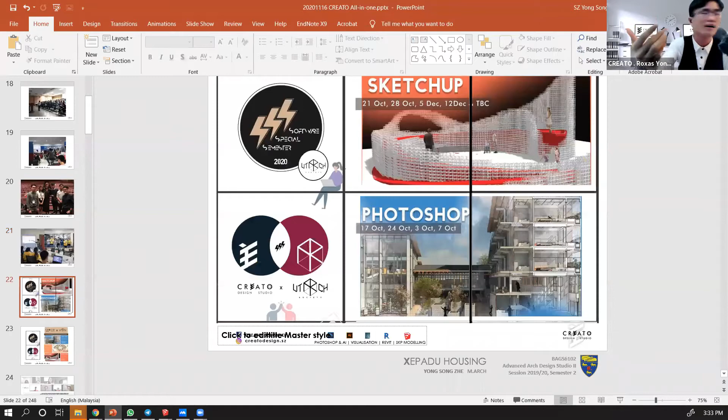Recently we've had a software special semester with UTAR Architecture Society. In this program, students may register for our courses, namely SketchUp, Illustrator, and Photoshop, through the architecture club. This workshop was just introduced about a month or a few weeks ago, so it's quite fresh, the first time.

During this, students can register via the club, and Creato will help promote it and sponsor a certain amount to support club activities, like student funds. It would be great if this continues in future, but we're not sure yet. This program's registration runs until the end of November for the next course, which is Illustrator.

As you can see, there are three things we're highlighting in this collaboration. It would be exciting to have similar collaborations with UM or TAUC, or other schools as well. We are grateful to be able to support some of these activities in terms of funding, within our capabilities, along with some of the topics we used to cover.

We share about authority guidelines, how many setbacks, which books we can refer to, the Bomba guidelines - things that weren't taught much in school, we share in the workshop. This one is a free workshop, but maybe only for Creato members. Sometimes we have workshops open to the public where you can invite your friends, and sometimes workshops exclusively for Creato members only.

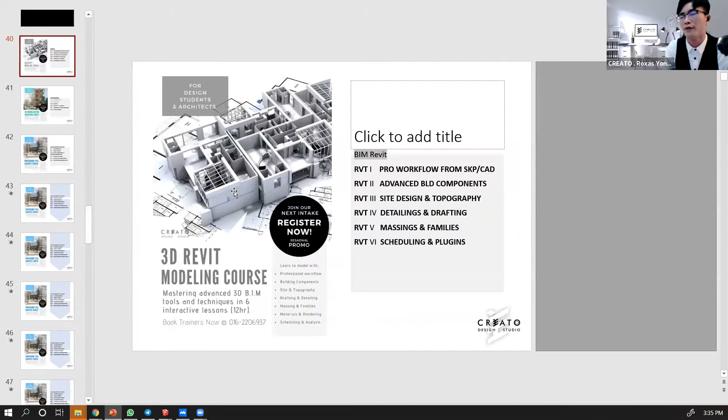These are a quick glimpse of the Revit course we have, the Lumion rendering course we have, and some of our previous competition works. This is some of our final project works, Photoshop work we have, and Illustrator we're going to have in January. Registration closed, and we decided to close it at the end of November, and this is what you are learning now - components and styles.

Get it here. Just get your SketchUp ready now.

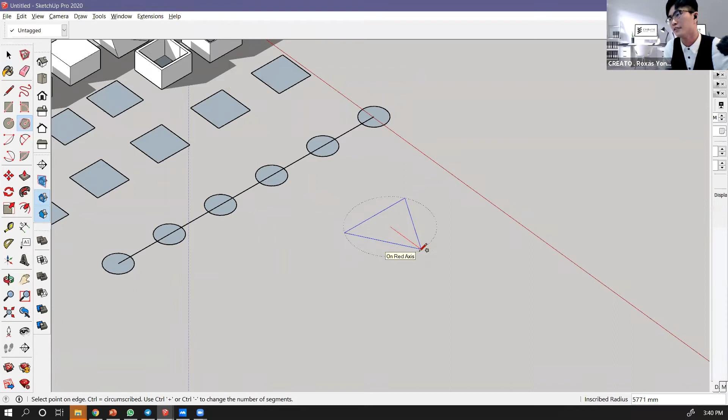Okay, firstly, to make this kind of stars, let's imagine starting to make a more complicated form. So let me make a kind of triangle first. I have this triangle, so I can decide the radius. Let's say I go for 3000.

Okay, I can press S to scale it up. S, okay, S is this one, scale, beside offsets, the neighbor of offset. So to scale it up, I hit S, and then I can drag it to make it bigger, or hold Control to make it bigger, and you can see there's a scale factor there. We can scale it up to 2 times bigger.

Okay, if I hit 2, I hit enter, so this is 2 times bigger. Yeah, I got it. So 2 times bigger. We can also scale it only on some of the axes.

Another way, when we mention about scaling things, there's one thing I want to mention: instead of using S to scale something, there's also another trick to scale things up, the entire model. Now we are only scaling one object, which is this triangle. But if you want to scale the entire model, what we can do is use the tape measure tool, which is T, which is this one.

All right, let me try first. Okay, cool. What I did was, initially you can measure this one from this point to this point, it's 10392, as you can see at the bar here, the length 10392.

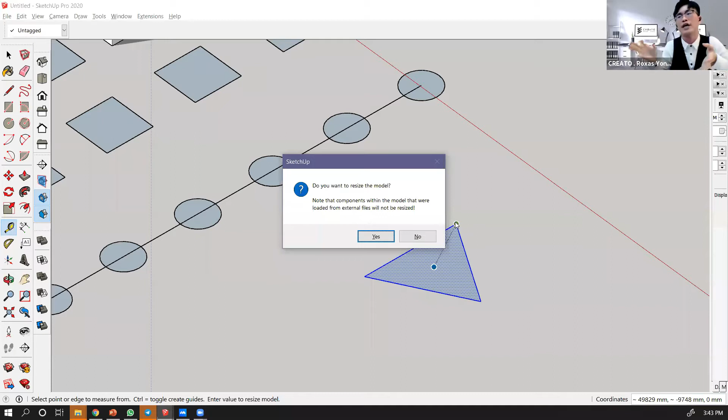But if I want to limit this, let's say instead of 10392, I want to make it become 10,000 - to let these things fit 10,000. What I can do is select this, using the tape measure tool. From this point to this point, I press second time, and then type in the new numbers I want, the new measurement, which is 10,000. So I hit enter, and it will ask me, do you want to resize the entire model, this whole project? I just say yes. Then the whole thing will scale down, so that it achieves perfectly 10,000.

Note that this is actually scaling the entire project now. So you will ask, in what situation will these features be used? This is when sometimes, like when we want to scale down - initially this measurement is the real size, because this is a 3-meter wall, 3,000. But what if you want to scale it down for 3D printing, or for laser cutting to make a physical model? Then you have to scale it down to get the model measurement. Let's say you want to make it 1 to 100, your model scale.

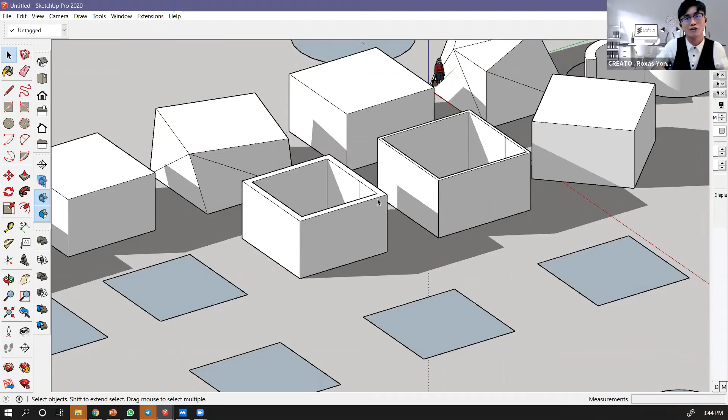Currently this number - let's share with you how to calculate, like a revision. So now this is 3,000 in reality. So 1 to 100 means instead of 3,000 mm, it will become 30 mm - 3000 divided by 100, so it's 30 mm. So now to resize this whole thing to become a physical model size, not real size like this - a physical model size that you can put on your table, that you can build using cardboard.

So this is how I can resize it. I just use the tape measure tool - this is the trick. You go to one point, the second point, then type the measurement you want. Initially this is 3,000. Just now we said if 1 to 100, it should be 30. So I type 30 now - you can see at the bottom right corner there, the tab there. Then I hit enter. So it asks, yes, I want to resize.

So the entire thing becomes very small already - small until, yeah, you can see this is like a model size already. So let's confirm it - is it 30 mm? Is it that precise? Yes, 30, you can see. I use this to give the measurement - yes, this is 30 mm. So with this you can print your model with 3D printing or make it for laser cutting.

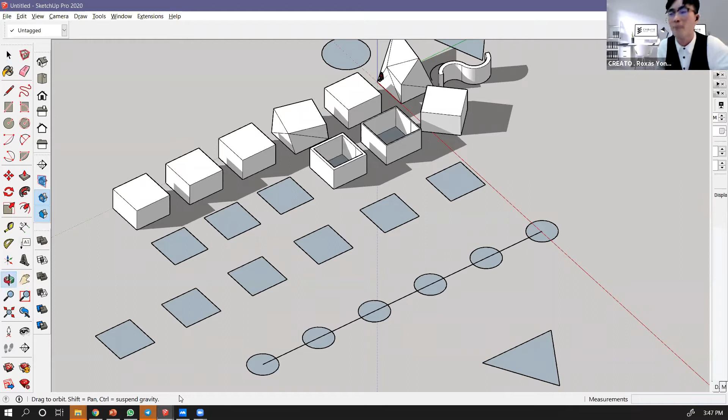Okay, let's say we want to make this kind of shape, the star shape. So from here, maybe I can... okay, there are a few methods, a few patterns I can make. Let's say from here I can go. Let me scale it down first. I scale 0.5, okay, so like this.

So from here, let's say I make a rotation, I can hit Control. Let's say I want to rotate 90 degrees or 60 degrees. Cannot.

Okay, for this one, let me share with you a tool, which is one of... you can actually... I can make this a group first, I hit G, and then copy to the side. Then I can right click, I can flip along. I flip along, maybe group's red, and now it actually becomes a mirror. How do I do that again? These items, I copy it first, duplicate it first, then right click, flip along, group's red.

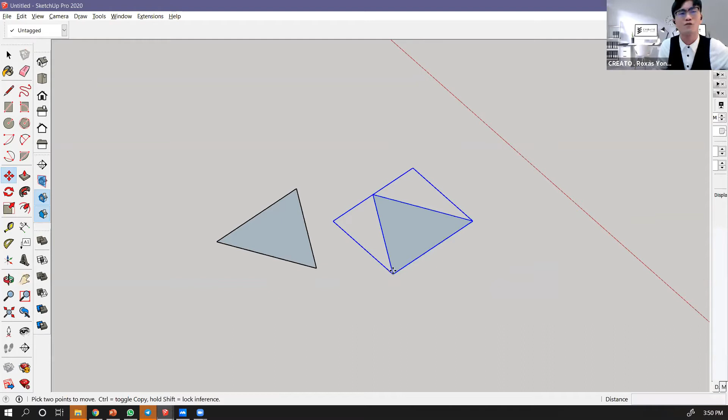If you don't have the plugin, mirror it first, okay, because you'll learn all the plugins starting from the third lesson. So now I'm doing it without any plugins. If I have plugins, what I will do is just draw the mirror axis, so I get these shapes. But it's okay even without a plugin, you can do it like this method.

Flip along, okay, flip along, and flip along, group straight means this is the red axis. No, this group has this red axis here. So you can see, actually, inside, every time you group something, it will have its own axis, its own origin. So this group has its own origin, its own blue, green, red line.

So I have this, let's say I want to rotate it. I can... okay, there's a lot of things I can do. For example, let's say I want to rotate it 45, 60 degrees, then I can times 6. So I got this kind of shape.

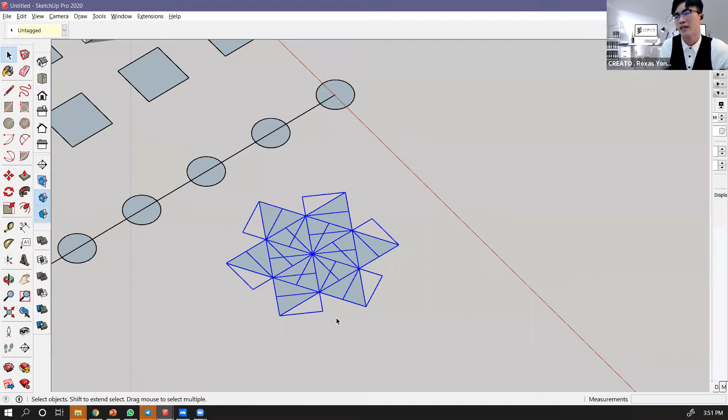All right, but now currently each of the triangles is in a group. So if you want to ungroup them, it also can be done. I select all of them, then I hit X, which is explode, so now all of them are exploded, it's not in a group. Okay, so if you don't want the line, you can also erase them.

Depends on what kind of shapes you want to play with. So what else? I copy this portion, then let's say I want to rotate it 90 degrees, then times 4, I get the shape. Can you get the shape as well? Explode now, it's like a shuriken, the ninja's tool, 手里剑. So explode on the shapes, are you able to achieve this? What else?

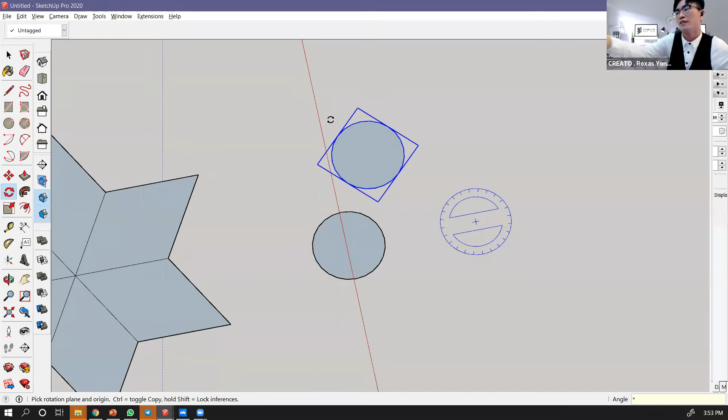So this means even if it's a circle, if I want to rotate it, I also can, I just have to define the origin. I define the origin, then I can let it rotate. Let's say I give a fixed distance, 45 degrees, and then say times 9, so it will rotate with this protractor as the origin. So I say times 8, okay, so I got this.

Okay, so now it's like your creativity to create pattern, to create form. First is pattern first. So it's time for you to explore on your laptop.

So for circles, there's a bit of a tip for you: sometimes you cannot find the origin, but what you can do is just hover to the edges of it, then it will hint you where is the origin of the circle, the very center point. So like this, I know, so I can do, let's say, times 6, 13 degrees, 60 degrees, times 6.

Okay, so you've got a different kind of formation, explore your formations, even square. So for sketch, our mini task 2, we want to see your creativity of exploring this kind of pattern in SketchUp. It's time for you to explode, to unleash your little world of creativity, okay? Explode your creativity world inside you.

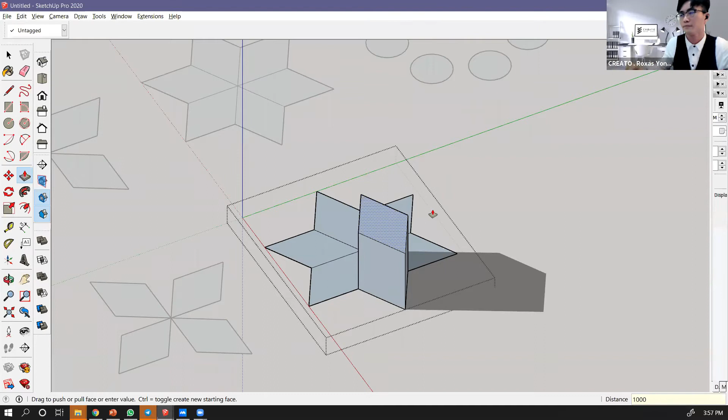Maybe not. Okay, let me push it first. So I try to push it to a height, let's say 1000 to all sides.

Okay, some advice for you. Actually, this gray surface is not so recommended. Better you select those surfaces, right click, reverse faces, make it become positive faces. There are more advantages on positive faces, but it's not a very big issue. Because last time, for Lumion, they cannot read the gray surfaces. But nowadays, if you are not mistaken, it can read this negative face already. So not a very big deal, but white surfaces will give more advantages, especially when you're presenting, also more presentable. So what you can do is select those faces, right click it together and say reverse face. Reverse faces. Make it more presentable.

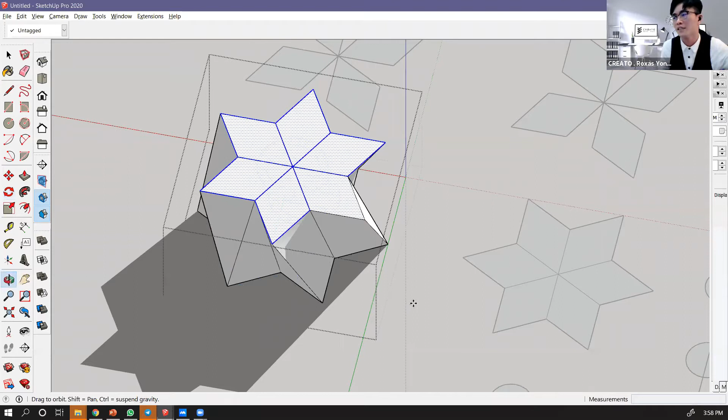Okay, let it snap to the adjacent, the neighboring shapes. Nice. Select all these pieces. See, I can rotate it or not. Yes, I can rotate it like 30 degrees in this case. Okay, so you got this, the degree. So what if I copy this again, these items again to the top?

All right, then maybe I can say it's not so good. Okay, just now I have already rotated 30 and 30 degree. So what if I rotate furthermore? This time is 60 degree, 90 degree, okay, or 60, as long as it fits.

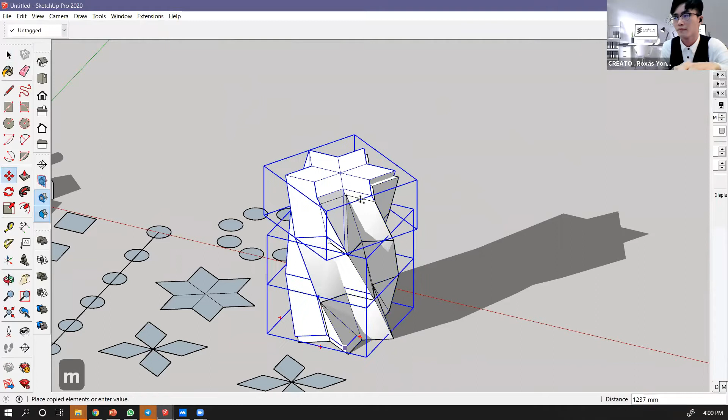One more from this to another level. Okay, rotate again. So you can see it's like a shape, it's like twisting already. So you can copy this module, like I can multiple select them. And hit M.

Okay, so you got this monster tower, like twisted tower, like done by who? Frank Gehry, is it? Okay, or Zaha Hadid. Very modern style of twisted tower. Okay, so practice this. From here, we can achieve this. And no matter you are year 2 or year 3, sorry.

Okay, what else we can do using square shape? Yeah, let's explore using this. Okay, once more time, similar method I will use. Firstly, I drag a height first. Let's say any height. Let's say I give a 3000.

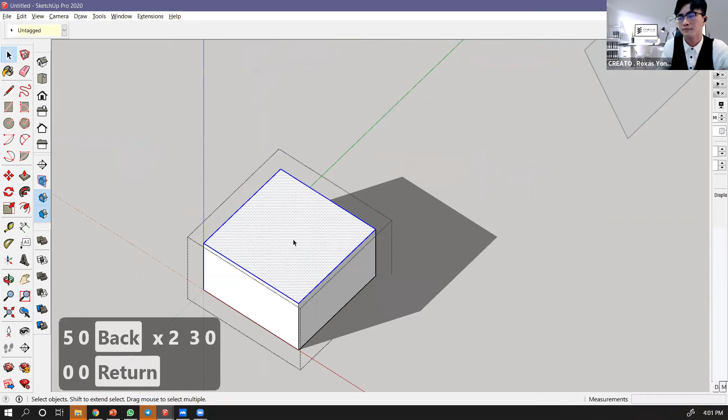Okay, here's another method I will show. Okay, you see which one better. Okay, this one is second method to twist it. Okay, then I copy it, duplicate. Then maybe I can say times 9 lah. Okay, depends on how many floors you got. Then I select all of them.

I say Q. I want to get the center point of it, but I can't get a center point, so I have to draw some cross intersection line. Okay, so this is just to help me to get the center. So I say Q to rotate. Cannot. Only the first one.

Okay, so we have to use back this method. So we can rotate the first one first. Okay, like when my mouse cursor is close to this line, it will tell me it will snap to the midpoint of it. Okay, you no need to measure by yourself.

So let's say for this, only select the upper faces. Okay, I'm just using very basic tools that we have learned just now. Selecting faces, move the line, move the edges like this. Okay, so I twisted this to, let's say, you must remember the angle. Let's say if you go for 30 degree, not too much, or 50 degree also can. Let's say 30.

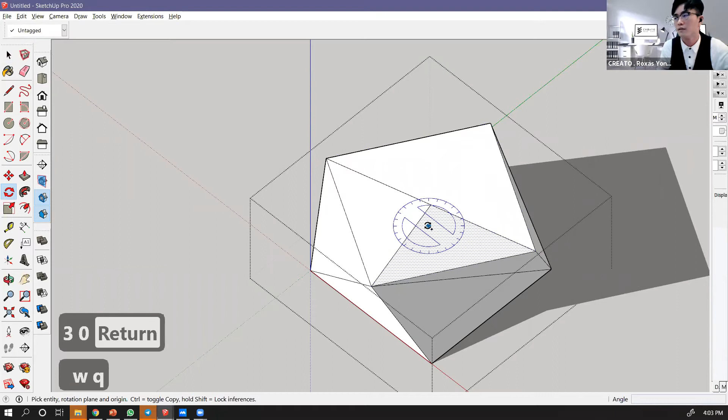I think 45 will be easier because you only need to repeat one time only. 45 is like too much. 30 lah, 30. And then actually I can erase the upper part already to make it clean.

So this model, I can... okay, this group, I have to copy this group and paste it on top of here. Then rotate it.

Actually, we can use M to rotate also, 30 degrees. And then duplicate this to another level, then hit M again to rotate it 30 degrees again.

So remember, for rotate we have two methods, either hitting R or hitting M. M is rotate group only, like this.

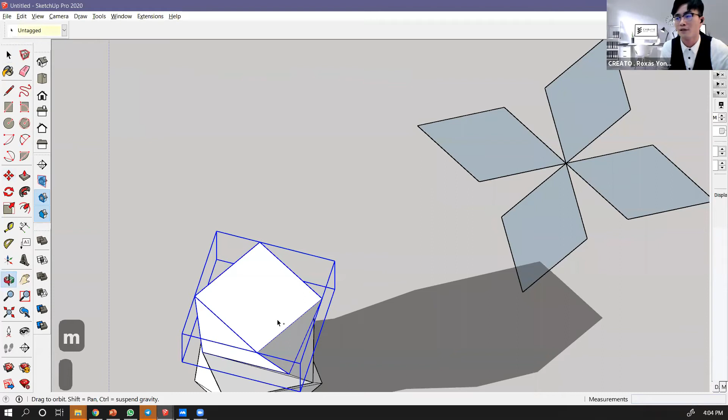Now we know it keeps repeating, so I can copy this entire thing from the bottom to the top. Times 3. Not yet, again, from the bottom to the top.

This can either become a tower, or if we put it horizontally, where I group the entire thing. Oops, I misgrouped some things. So now what if we have mispressed or misgrouped something into the unnecessary group?

Let's say for this one, you can see these petals, these flower petals, this shuriken has entered this wrong group. So what you can do is go inside this group. Most of the students will explode the whole thing and group it together. This is a traditional method, but we have a more advanced method for you.

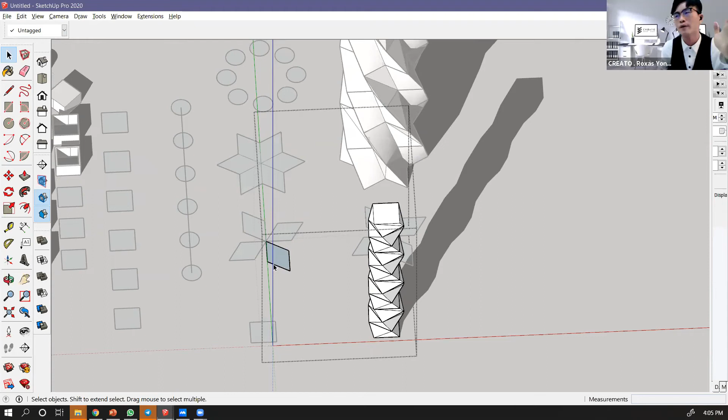Not really advanced, but a smarter choice. Go into this group, select these things that you want to exclude, Control X means cut, Control X, then escape from this group. Now you are in this group editing mode.

So escape from this group editing mode. Then outside here, this is not a group, this is outside currently. Just hit Control,

Shift, and V. Control V we know is paste, but with paste you will follow your mouse cursor, so you can't paste at the exact place. So what you press is Control V together with Shift, Control Shift V, which is paste in place. Same goes here, paste in place.

Initially there are no shortcuts set for you, if I'm not mistaken, but now gratefully you have the Creato SKP shortcut data file that you imported just now, so you can just straightly hit Control Shift V. Easy.

Okay, so now it's grouped properly already. I put this back to the position it's supposed to be. So we have this group.

If we put it horizontally, I copy this. How to make it horizontal? If we hit M, we can move it. M is not only restricted to the upper surface, it can be on the side as well.

It can be moved like this as well. And then I hit move to what degree? 90. So this can become what? This can become an iconic bridge.

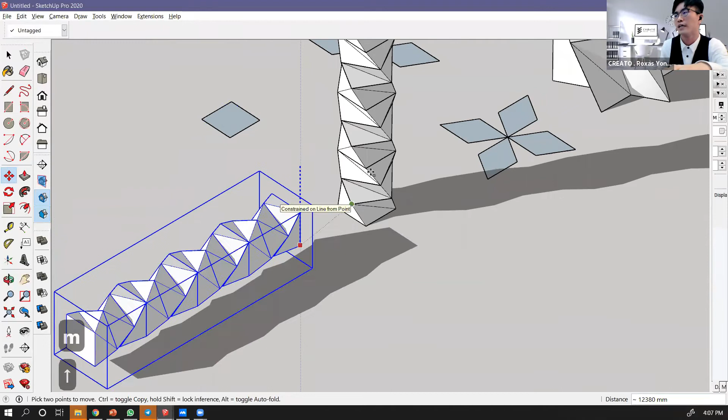An iconic bridge to connect some buildings to another block. Imagine below this is a highway or something. So it's a pedestrian bridge. I think something in Singapore looks a bit like this. There's a bridge in Singapore, a walkway.

If you remember the name, let us know in the chat box. What is the name of it? There's a spiral structure in Singapore, a walkway, very nice looking. Let us know in the chat box if you remember the name.

Let me check, is it spiral? Yes, okay, Helix Bridge, Singapore. Just now we showed Daniel Libeskind's Museum, now we have the Helix Bridge.

This could be an inspiration for you to make a more complicated form. Of course, we are not going as detailed as that yet. We have a class called Sketchup 6, which is more on organic form, that time we will learn more deeply into it. But this kind of shape you can explore in your SKP mini tasks too, that you're going to do this weekend and submit on, let's say, Friday.

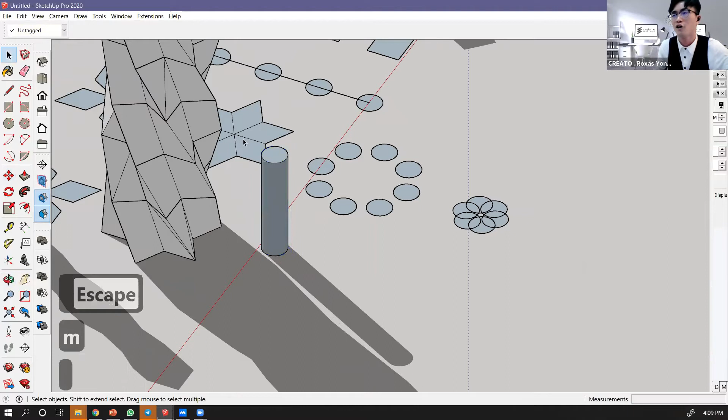So actually, round shapes have some hidden edges along the curved surface. You can see when I triple click it, there's a lot of dashed lines, or we say hidden lines. So this hidden line, how can we unhide it? Are we allowed to? Let's say how to unhide.

Okay, when you go to View, there's an option here. You can enable the hidden geometry, make the hidden geometry visible. So you can see all these dashed lines in this cylinder - the dashed line is hidden geometry. This is from 2020 onwards. I think in 2019 there was only one option, hidden geometry combined with hidden objects, but now they separated into two, though not much different actually.

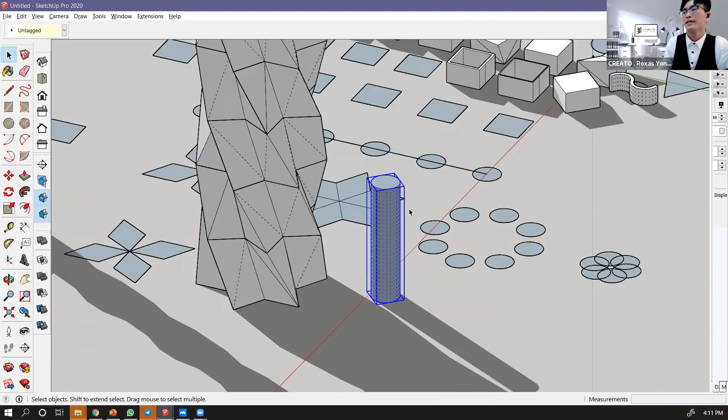Easy to understand, no need to explain. So geometry is this line. Object is if you want to hide something, you can. Let's say I select this, I right click, I say hide. So it becomes a hidden object already. To find it back, I say hidden object - so here are all the hidden objects. Then I select the hidden object, right click it, and unhide. So we get it back like this.

Hide hidden object and hidden geometry - make sure you are clear about that. Geometry is all those dashed lines, it's elements like lines. Object is the entire thing.

Right now it doesn't have any shortcuts yet. So now I want to teach you how to make it fast to show those hidden objects, by pressing Ctrl H. Now Ctrl H doesn't have any function because I used to set this on my previous version of SketchUp, let's say 2018 or 19, but now because it has introduced new features, it doesn't apply. So how do we set the shortcut? We don't just want to help provide you fish, but we want to teach you how to fish - 教你怎么样钓鱼 in Chinese. So what we can do is go to preferences.

The feature hidden, okay, you can choose hidden objects. Then you can type in the shortcut you want. Let's say we type Ctrl H, then we hit plus - assign. So we say OK. Now onwards, when you hit Ctrl H, it gives you hidden objects. Let's test it. Okay, Ctrl H, it will show us this in dash line. So if you really want to unhide it, you have to select, right click, and unhide.

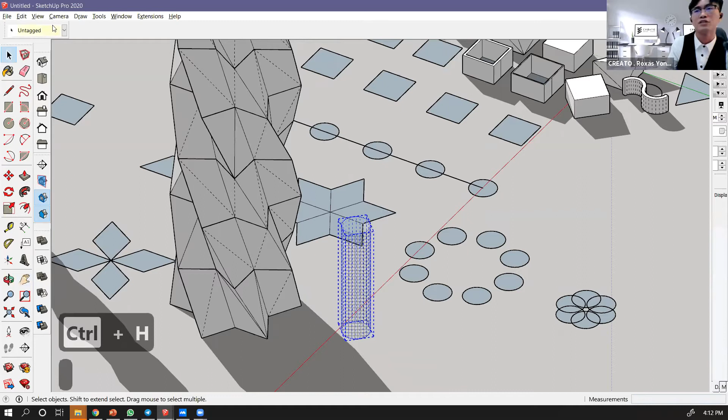Now I want to share with you more about the right side, before we go deeper into the component part. On the right hand side, the trays - I have to drag it out. A few lines always keep hiding themselves.

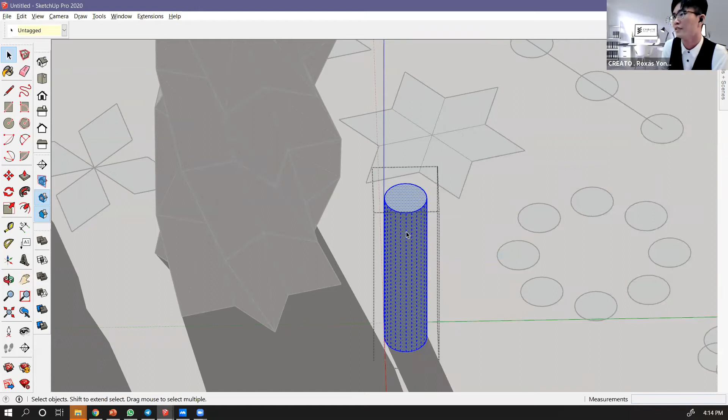Let's say for this cylinder, when I right click, there's an option for me to adjust, which is soften or smooth edges. Let's try this. If it brings me to this tab here, then I just say soften or smooth edge. I can drag these sliders - if I drag it to the left until the end, you will see all the lines become visible already. All the hidden geometry becomes visible edges. So this is the way we can get all the lines to become solid.

And let me try - what if I rotate this? Wow, okay. I get a center point, then I rotate it 30 degrees. Now you can see it has a new look already - all the lines are tilted. We can make crazier shapes.

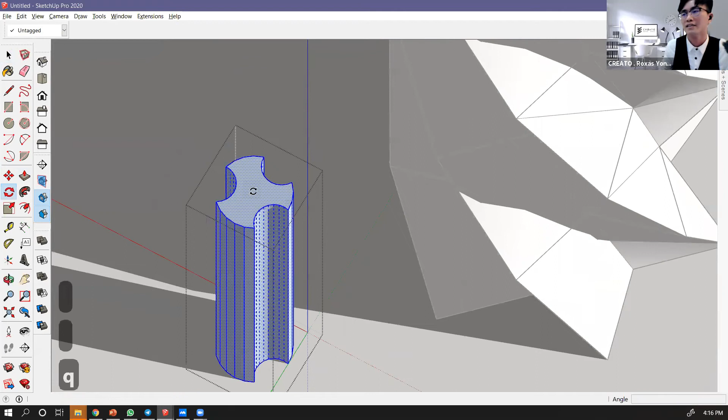Let's erase this one, I can push it down all the way to the bottom. Just have fun exploring shapes. And then let's say I want to rotate it, see what will happen - not just the upper surface. Yes, we got this like a trophy.

In China there's a building something like this, it's called 小蛮腰 in Guangzhou. In Guangzhou there's a significant tower, reverse face, something like this. It's called Canton Tower - yeah, it has a waist, 一个腰, like a body waist.

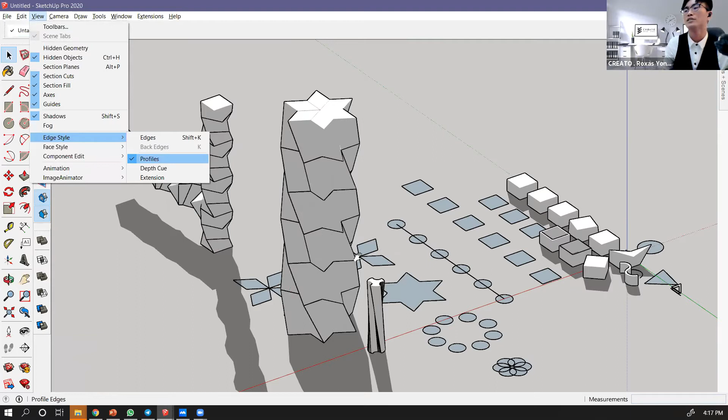And you can always press Shift S to switch on your shadow, and Shift K to switch off your edges - Shift K shows all the edges. But why is there still this profound thick line here? Because besides edges, there's also a profile line. If I turn off this profile line too, then you're totally without any edges. Of course it will look a bit more realistic but it's not so defined, because people hardly know where the profile line is. So sometimes in an emergency when we want to present but have no time to render, we can actually present using this. You don't want to show the lines so clearly if you're not ready yet, so you switch off the edges with Shift K.

Shift K shows all the edges, all the thin edges. Then there's profile. So there are edges and profile. Profile, we don't have any hotkey for it, but you can see it from the View menu, Edge Style. Profile, we don't have any hotkey, but Shift K shows all the edges.

Back edges is only K. Only K is back edges. It's like all the lines at the back. Let's say for this, all the lines at the back.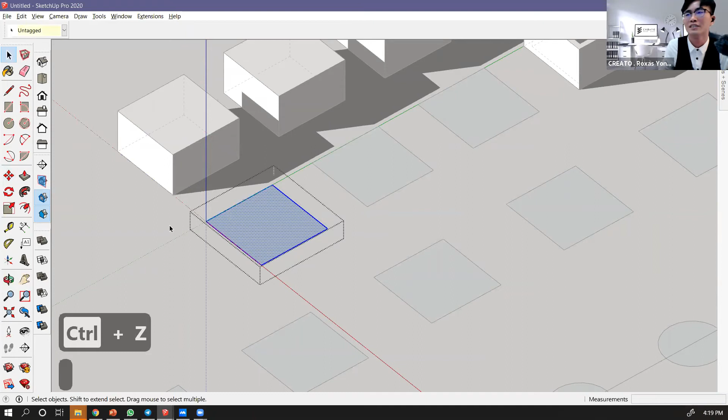So you can also see, what is this for? This is actually for you to be able to snap things or go towards inside. Let's say if I have this line open, K, then I can actually move these things and snap to inside without keep rotating my camera angle. I can make it snap to this point behind easily. This is the reason, so this is quite useful as well.

Like actually for walls, you have many lines overlapping each other. Even in this case, I still can select the point inside because I have enabled back edges. If without, it will be like this. So with back edges, it's like I have X-ray eyes, 有个透视眼 in Chinese. So K is back edges, quite useful.

Shift K is all the edges. You still have one thick line, which is the profile line. And this profile line, we can actually adjust its thickness. I will share with you about that later, about the thickness of those things, which makes it easier for us to do diagrams by adjusting the profile line. That one later.

Okay, now you can spend like 2 minutes exploring the form factors. So you are, you are form makers now, 3D form makers. I'll give you 2 minutes to explore the form, the mass.

Next I'm going to share with you is component. So we learned about group already. What about component? Component is something like group, but it has extra features that you have to know and utilize when you're using SketchUp. If you don't utilize component, 没有善用 component 的话 in Chinese, you didn't make full advantage of the component, then you are not using SketchUp well, not fully utilizing it. It's like you're driving a Ferrari but you never accelerate. If you never use component in SketchUp, it's a parable like that.

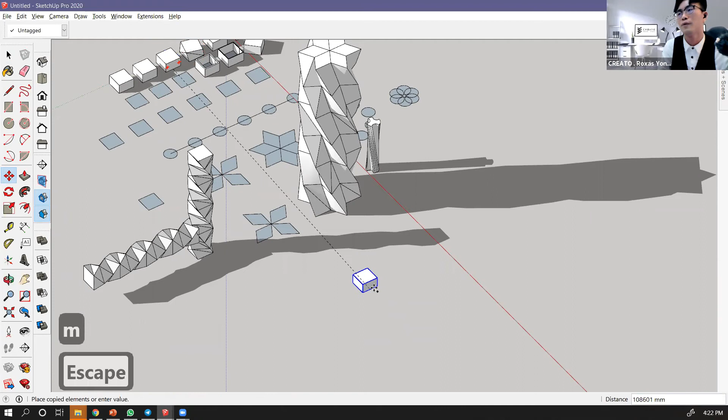Let's say I take this one of the square shape, the block, the cube. Now I want to make a railing for this. Wait, maybe it's better I use this as example instead. So I have a series of rectangles here, and each of them is a group.

As you can see, when you double click it, we enter the group editing mode. When you press the dot, which is the key beside the comma, it will isolate all the other items. Press it once again, it appears again.

What is it, is it possible if I want to make it, because it's a similar rectangle square shape, once I push these items, other rectangles follow as well? Once I make this one become red, others follow as well. Once I create...

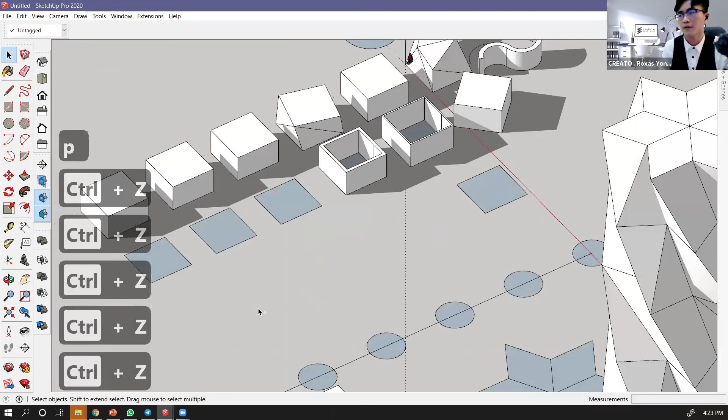Sometimes this will happen, like something goes missing and flies to somewhere in SketchUp. This is quite normal. What you can do is, you can hit zoom extents to find if there are any elements that flew very far away in your project. Sometimes this happens, especially when you're making 3D models, pushing or extruding some items, something might fly very far away.

What you can do is just keep undoing it, that's the first choice. Second choice is you click zoom extents to fit all your models in view, to show all your models. If there are any things that flew very far away, then you move them back to where they're supposed to be. Like this one has flown here already, but never mind. Sometimes there's a flaw in the programming, it's normal. Keep improving, keep exploring.

What I meant just now is, is there any method so that if I push this to a certain thickness, others will follow, and then if I create an opening on it, others will follow as well.

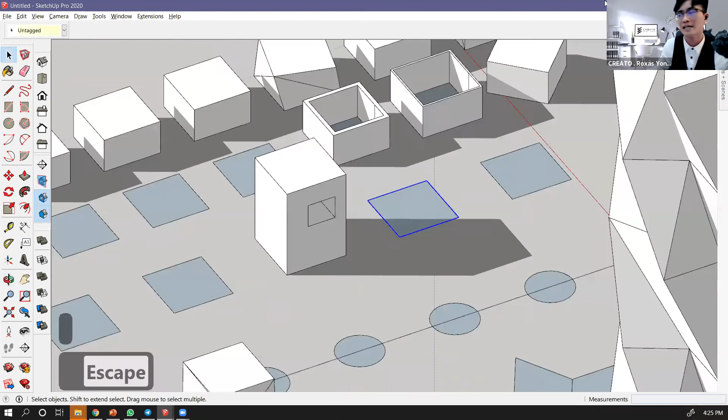I create an opening here, push it, and snap it to the end. To another edge, then create a hole. Others will follow. When I apply red color, others will follow.

Yes, there is a way. So how can we do that? Component. Just now when we right click, we can make a group. For a non-group item, there's make group and also make component here.

So now we're going to learn. We have learned make group, now we learn make component. What we can do is firstly we have the shapes first, or we can draw it out. Let's say this one, what I want is...

3,000, a smaller one. Then I can right click and make component for this instead of make group. But if I accidentally hit group already, hit G, which is make group already, never mind, it's the same.

I also can convert it to become a component, so make component is the same, it doesn't affect at all. So I can name this component, simply give a name, better to give a name. There are some advantages I will share with you in the upcoming class if you have chance. Give a name, but any name is also fine, as long as it is unique.

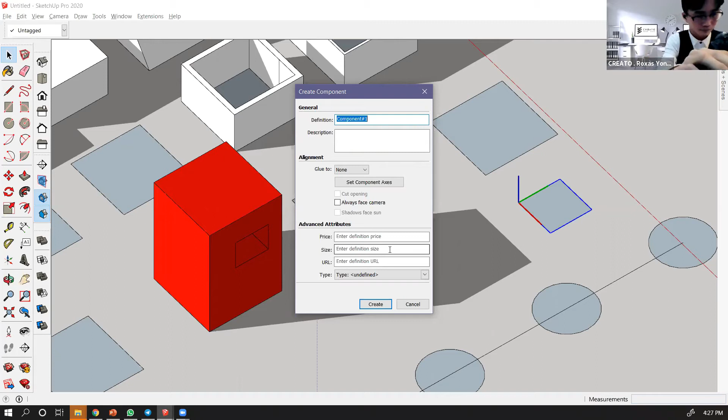So better give a name that you can briefly identify. Let's say this is a square one. So this is a component now. So when I copy this component, how do I know it's a component? I can check at the entity info.

This one mentions it's a component in entity info. This one is a group, it's different. If it's a component, you right click it, you will find this option which is edit component. In a group there's no this, you can only see edit group, cannot see edit component. So I know this is a component, so I can copy it like what we did just now.

I move this first to make it align to this. Align, go closer to make it snap to align to this. Then I copy it, I hit M, and then Control, and use the arrow key to limit the direction, the axis. Then I say times 5.

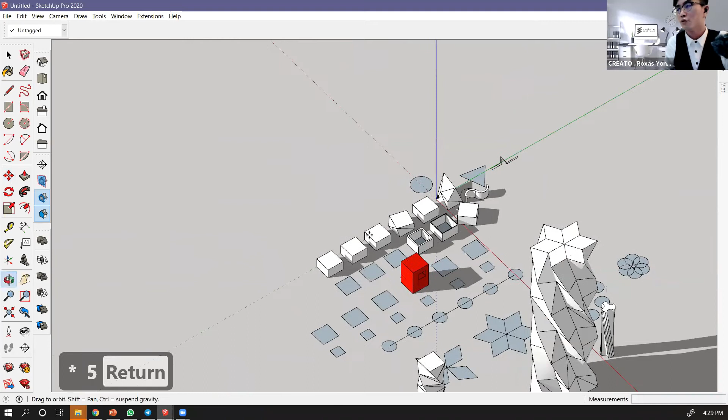So the smaller one is a component. Now is the time we can differentiate. When I select one, others will be highlighted as well. When I push it, others will grow together. When I create openings on the edges here, then push it, others will follow as well.

Create it bigger, maybe make a circle here, then cut it off. The circle is not well done. I have to make sure it's carefully drawn on the surface.

Then sometimes you have to erase those unnecessary edges. So all will follow.

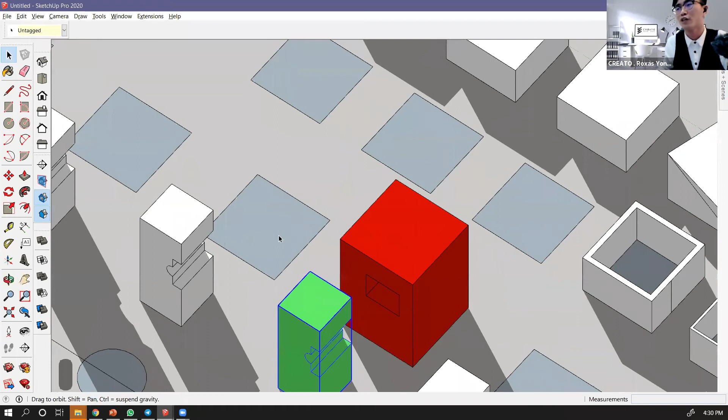If I apply a green color, what happens? It will go green as well. Very not nice. Oh, color will not follow if I apply here, but if I go into this group and apply the green, from no color now...

This is common: if I apply it outside here, it will not affect the others. But if I go into this group, you can see all is highlighted. Then if I apply colors, when all is highlighted like this, then all will be affected. So this component makes them like a same gang, they are in the same gang - component is like a gang, same gang, so all will follow, like follow the leader, in the same pattern.

So what we can apply this, especially when we are doing repetitive elements such as chat box - let us know what we can apply this component editing on our model, on what things. For example, on what components we can edit, apply these skills. Chat box: columns, cool, yes column, louvers, yes, staircase, sometimes yes.

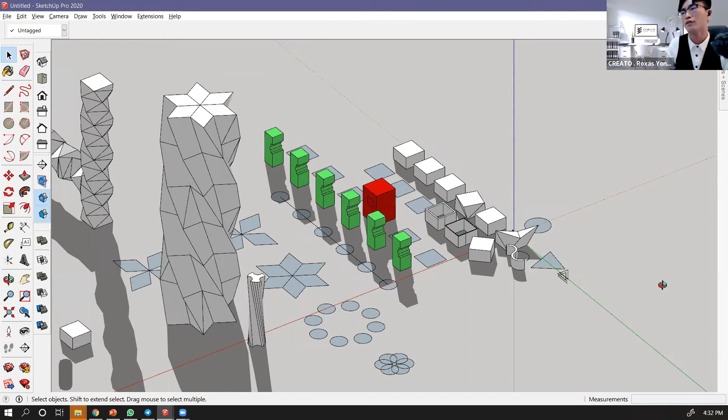Bingo, railing. Yeah, that's what we want to move on to now, railings. Let's say this is a ground floor.

Maybe there's a door, okay? I want to create a door. I create an opening first. Let's start with a very simple form. Let's say I give an offset of 150. Then I create the void inside. Okay, so this is like a room.

So I create a door. For the door I can use rectangle 2R. Then I can type the dimensions. Maybe the door is around... you can look at the dimension. So like this door, you can type in the specific dimension, maybe 800 to 2100.

And then select the faces, hit P to push in. Okay, then we create an entrance for this.

Okay, and then now I want to create a roof for it. Let's say a roof, I use a rectangle first, and then hit P to push it for thickness. Let's say I want to make it 300. Okay, so this is a space with a rooftop.

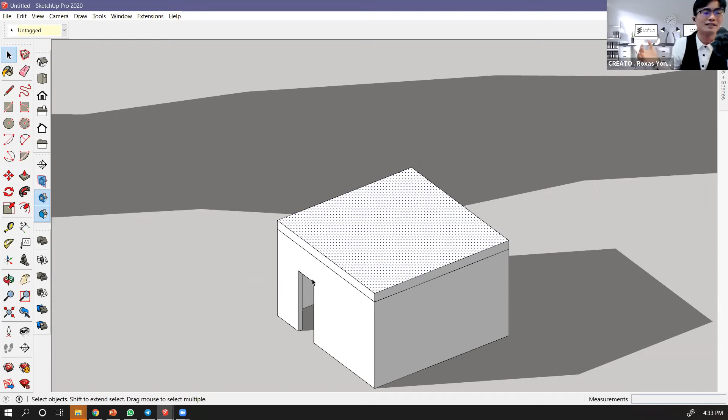So now I want to create a kind of rooftop garden on it. So there's a railing that surrounds this rooftop garden. It's very common in many design proposals. So what I can do is start to create a kind of railing.

Okay, usually we start with a very simple railing first. This one is okay. Let me group this first. Group this rooftop first. If we group it, there are a lot of advantages - you can easily move it away, replace it, or edit it in a group editing mode. So it's better to group it.

So if you want a very quick method, a kind of railing to surround it, is offset - like we are doing walls. I enter into the group editing mode, hit F, then offset. Let's say offset 100, 100. Then I push 1 meter height.

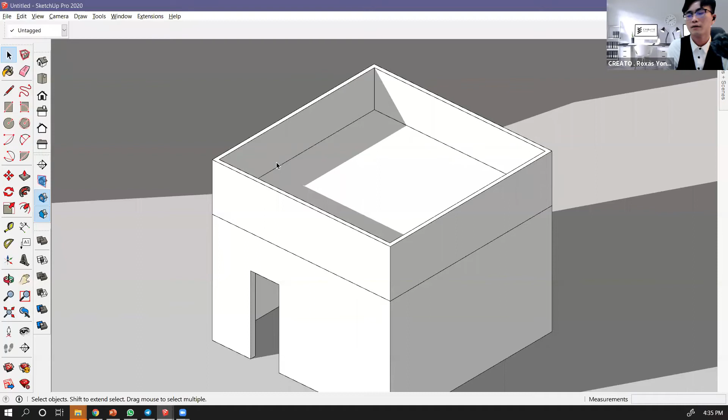Okay, this is the fastest way, simplest way, but not the best way. Because like this, the railing, the concrete railing, or whatever we call it, this wall is forever - fixed to this floor already. We hardly can remove them.

Hardly, if we apply materials, then these whole things - let's say we apply glass. Go to the material tray, and then this one. I show the blue one. If you apply that, the whole thing, even the floor as well, gets glass applied. So this is actually not a good method, but of course it's the quickest one.

So a better method is, after I offset it from the floor - this is a group, as we know - after I offset it, I copy it to the air, like 1000 up, and group it. Group this thing in the air.

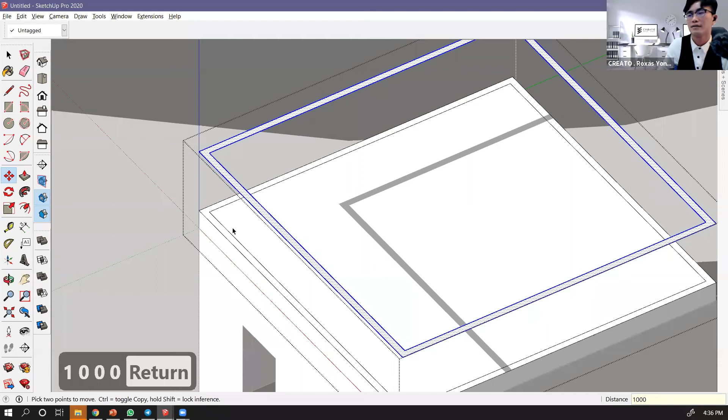Then only you start to push it down. So now the good part is this parapet wall - yeah, I remember the word - the parapet wall, or this 1 meter high railing at the roof. You're able to separate it if you want, and you can apply any kind of materials without affecting this floor. This floor you can make it become green if you want.

Or if you want just the surface to become green, that also can be done - just the surface, so the other place will not be affected. So this is the good part.

Like I copy - okay, I repeat again, I know some of you might find it a bit hard to follow. I copy after I offset at the bottom. I double click, select all the edges, then copy it to the air. Hit M, copy it to the air, and make sure it raises up 1 meter high or 1.1, depending on what you wish, and then group it. Then I enter into this group and push the bottom.

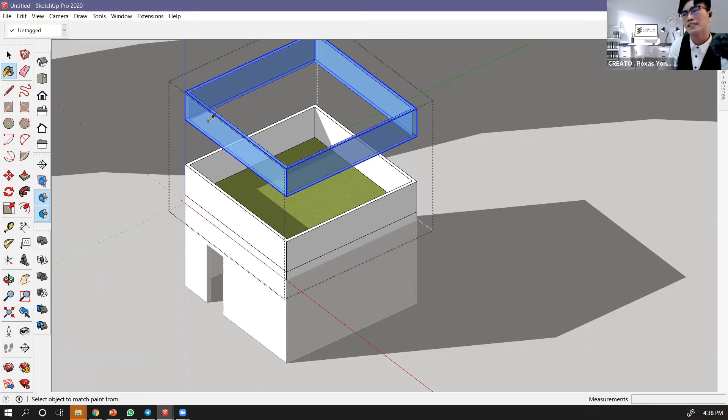Okay, let's say then I can apply material. If you want a faster way to apply material, I can hit B, which is color bucket, paint bucket. Then I can hold alternate, just like Photoshop - we learned hold alternate - then you can extract this color using the eyedropper. Then apply it to the bottom, or you can copy the material and get the same effect. So this one I can remove away.

So this one is the simplest way, the simple and effective way to do simple railing. Later we're gonna start to create harder and more challenging railings and facades.

Okay, I give you 2 minutes to digest this. Later we'll move on to a more complicated railing like this. We create it ourselves, not using any component from the 3D warehouse - no need, create it by yourself, on your own.

And start to digest this one first. I'll give you 2 minutes.

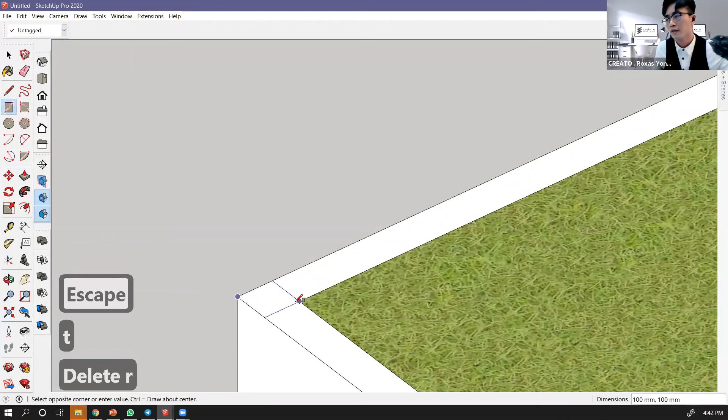Or maybe you can hit R. We make the first member first, the first gang member. Using rectangle, instead of 100 to 100, maybe I can say 100 to 50. Okay, so this is like the first baluster we have.

Before extruding it to become 3D, we recommend you group it first before you push it to 3D. So we say group, then enter it, then only push 3D. This is better because later you might forget, and then grouping becomes more steps, more tedious. Okay, let's say 1 meter high.

This is a bar. Then before we copy it along these edges, along this balcony, we add one more step: make component. Just now we made a group already, that's fine. Now we convert it to become a component. Make component first, give it a name, simple one, railing.

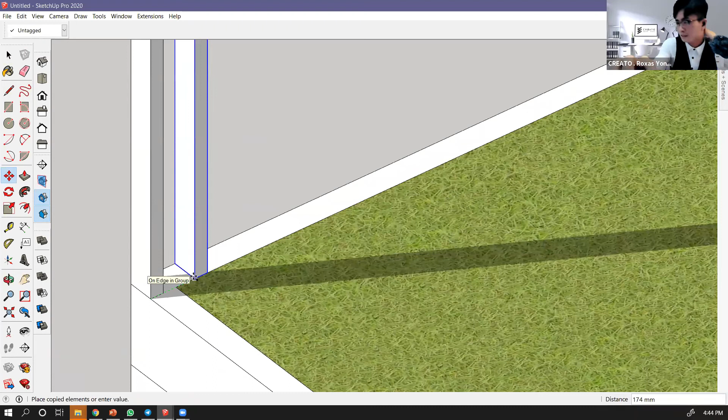Then only we start copying, duplicating it. Let's say if I want a fixed distance, what is the interval? Let's say 100 mm. Okay, 120 lah. 120 is too close, maybe I can give 150. Then we can times, let's say times 30.

Then we got this. So okay, we still haven't achieved it. Then we copy a few more, times 3 maybe. Yeah, perfect, we reach this.

Now you can see, because it's a component, all these components - when I edit either one of them, let's say this one, I create openings on it, let's say rectangle on it, I push, all gang members will follow because we have already made it a component. So if I select one of the edges at the bottom, then push it inwards, all will follow as well.

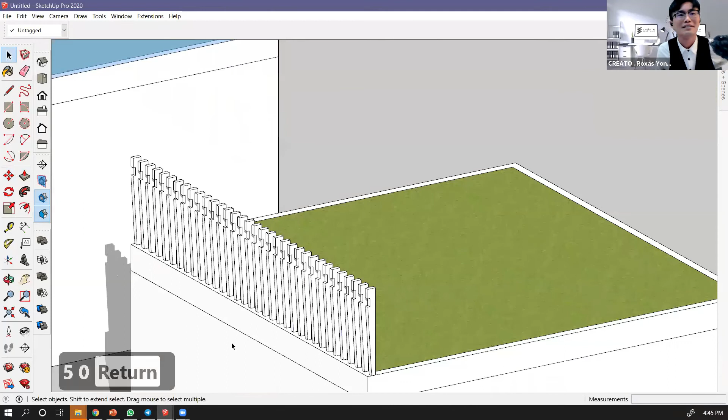Wow. It is like one of the smartest features in SketchUp without any plugin. Okay, and then what else? I can...

Apply, let's say, color on it. Color, color. Okay, let's say if I want to make it stylish a bit, I want to have 2 tones of color. Maybe if I want to use some curved lines, maybe 2 point up, okay?

I go from here to the bottom edges, here, then I can... maybe from here to here. I just utilize all the tools we've learned today. Okay, so we got a streamline here.

Okay, this is like when you are blocked by some things. This is the time you need to hit the dot. Okay, so the other things are isolated, and you are very free, nothing blocking you anymore.

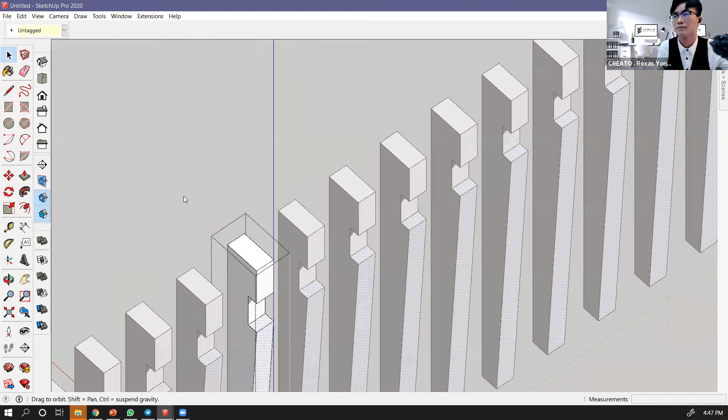Okay, all the surface, maybe I paint it with a timber texture. Go to wood and then timber. But this, maybe I put in some aluminum, metal, aluminum. Okay, going to be a cool color combination on here as well. Maybe on the other side as well.

Hit B, paint bucket. Okay, so this is my component railing. Then I can, then I can create a kind of handrail, top rail for your hand to hold it.

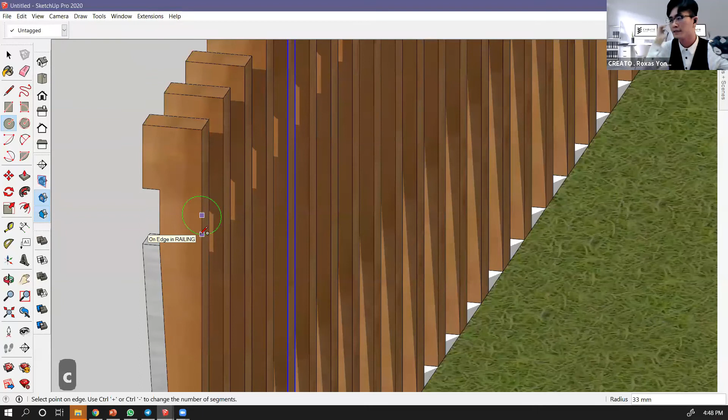Let's say somewhere around here. Okay, the handrail maybe is around 50 mm. 50 is too much, 50 diameter is okay. So if radius maybe 25, okay, cool. Then push it all the way.

Okay, select this all, group them, give them a material. Let's say the shiny one, this one. Not too nice, okay, maybe the lower profile one. Okay, then maybe this rule.

I can create some extrusion to cut it. Maybe 40. Then I cut it away. This extra one can delete it. Eraser, hitting E. Some of the unnecessary ones can use eraser to erase it.

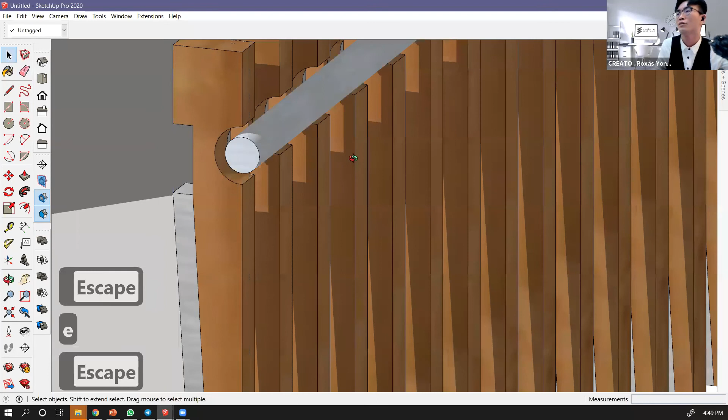Okay, so we got this very custom made, very special component railing. Why we say component? Because if you edit one of them, others will follow. Let's say this one, I make it even more dynamic, more crazy, like this.

Okay, so these things, the whole things I can copy them. Okay, go to a smart angle. Then select them, copy them, group them, and then you can apply them on others. Copy these entire things to, let's say here, and then I say Q.

Rotate, I can control my angles, using the arrow button, arrow key. Control my protractors. Okay, so same goes to, I can hit M, control to here, and then we can flip also.

Like mirror. If you already have mirror tools, then you can use your mirror plugin. Now I'm demonstrating without any mirror tool. Flip around. Okay, then done, basically done.

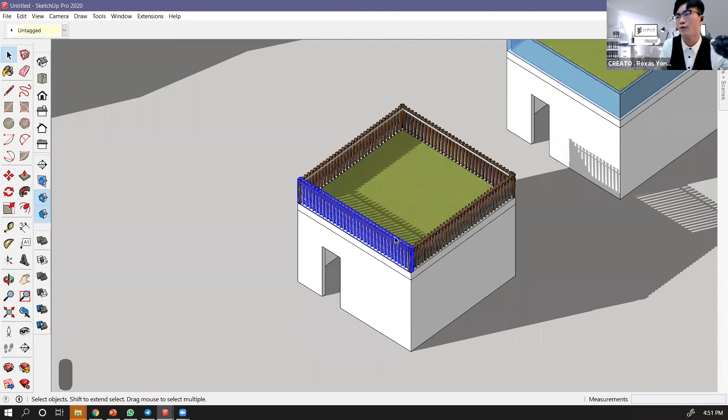So this is on the railing. What if it is on facade? Similarly, it can become your facade as well. How? So let's say I want to make this as my facade.

These entire things I'm bringing to the floor. Let's say maybe this is a kind of shopping mall or retail or theme park. There's a very fancy kind of facade. Then we can scale the entire things to become a theme of facade.

But if you want to create some kind of rhythms, some up and down, how can we do that? Some kind of rhythms. Then this one, I enter this group, and then we have a lot of components here. The thing is, now if I edit anything inside here, the others will follow as well.

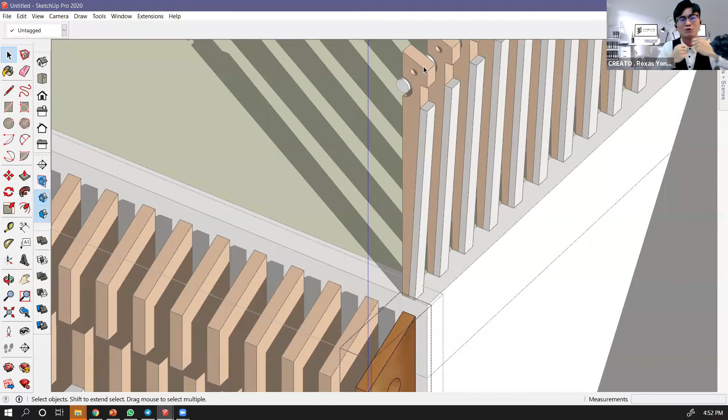Let's say if I open the hole here, others will follow as well. So if we want to stop this kind of gang membership thing, like we want it to quit this gang, we want this to quit from this club.

What we can do is we want it to exit from this component relationship. So we can go to this, select all of the components inside this group, right click them, and say make unique. Unique is the opposite to component, it's directly opposite meaning.

So when we say make unique, then now this is no longer under control in the same gang boss. So when I create a hole here, others are not affected. But all in this gang member, they will still have holes between them. Because they are still, this all is still one gang.

I select all of them and make all of them unique together. So now you learn one more thing, make unique. So it's a bit like explode, like group, but this is like component. So we can decide how many things we want to make unique together.

I just, yeah, we know some friends, maybe connection, they got kicked out, but yes, we admitted already. Okay, welcome back.

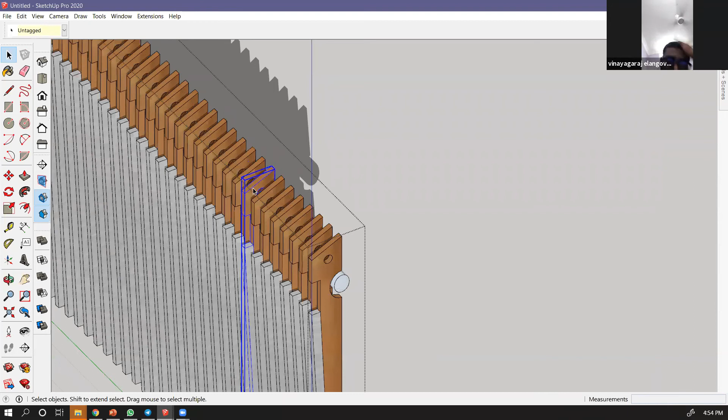So we can decide how many things we want to make unique together. Let's say if I want to, okay, what we can do, something like, I want to select at the interval of 3, every 3 elements. We select every 3rd element, then we can make a change.

Then we will create some kind of pattern. Every 3rd one, we select them, and then I click make unique. So this selected one, they will become a component themselves, a gang in themselves. They will not be affected by the others here.

So what if I change something, like I make this higher? Yes, so those ones will follow. They are in the same gang already, they ganged out by themselves already.

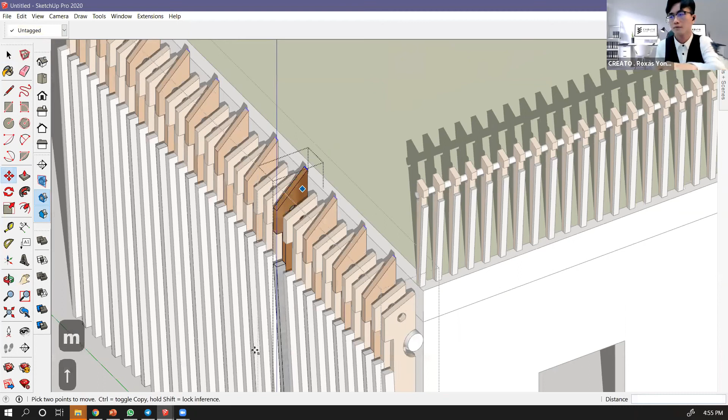So let's say the bottom as well. I use the up arrow key to control it. So now we have a kind of pattern already. So also to its neighbor, every third member we also select it. Maybe we can do something from it.

Okay, then I make component again. This time, this one also higher, but not that high. Oops, I missed something, I think. I missed something, wait, Control Z. Okay, make unique.

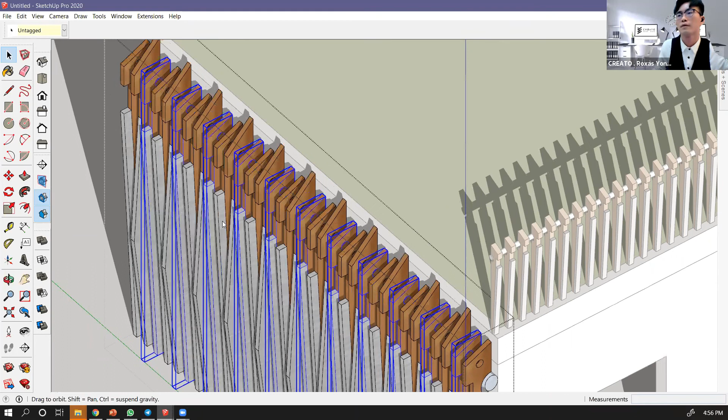Yes, then we can create a second variation. Higher than this, but shorter than that one, maybe.

Okay, so here we have three variations. Got three gangs here. Got three gangs here. Yeah, so this is a kind of facade.

If you want to enjoy finding a nice view of it, you can hit Shift K to close the edges and also the profile line. Go to View, hide profile, close it, and then you can switch on the shadows. This is the beauty of it. You can enjoy.

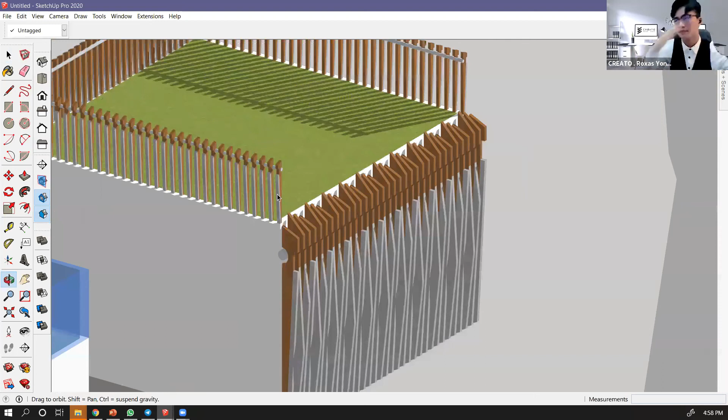Okay, then find a good angle. Then you can export a few images. Let's say this angle is actually not so good, because it's blocked by something. So you can rotate the entire thing.

Let's say if I find this angle is nice, I can decide whether I want to show perspective angles or parallel projections. Let's say I'm satisfied with this one. Then I can say, I can create a scene for that. I can say Shift A, create scene.

Wow, what I did just now. Do you see? Shift A to create a scene. It's actually a shortcut to View, Animation, Add Scene. Shift plus A. So it's like if you remember this camera angle, it will take a photo like that. So every time you can go back to this angle. If you like this camera perspective angle, then you can Shift A.

So if you Shift A at this angle, then I can go to, let's say, File. Let's export this angle, I mean export this image right now. Export 2D graphics.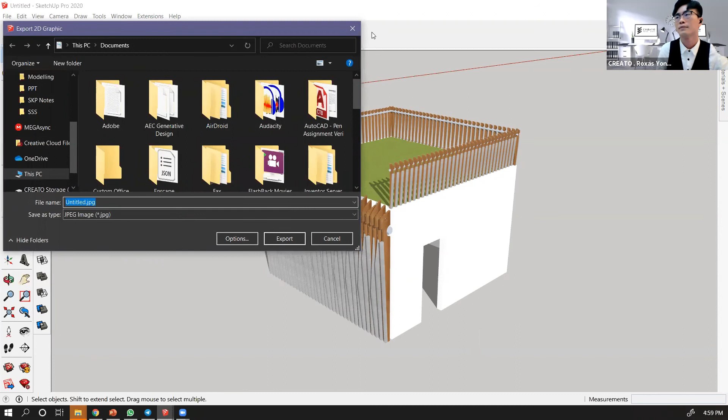Then, okay, maybe I can adjust my shadow first for a better angle of the shadow. Go to the shadow tray, then make sure you already switch on the shadow. Then find a good angle that can show your profile the best.

Yeah, something like that. Then if you are satisfied with it, you can right click, update this. If you have any update in the angle taking this photo, you can right click and say update, or else you will never remember this new angle. This is to remember the camera angle only, not the content. Content is not affected.

This is the camera angle. And then I will say File, export 2D graphic. If I want to export images, choose JPEG or PNG will do. Let's say JPEG.

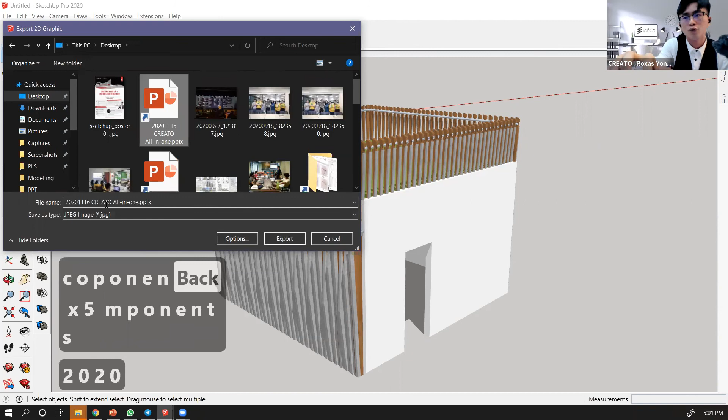Go to desktop and create a folder for today's lesson. Let's say SKP2, component. Then a name for it, today's date, 2020. You can save it with your name.

And you say options. Here you can actually adjust your resolution, you can see the width and height. But for the moment you don't need to adjust so much yet. When the time comes, I will tell you to adjust it better. For now you can just leave it at the highest quality. That's fine. Then export.

Okay, then you go check. This is my folder just now. This is my saved file just now.

So then export a few angles for us to understand it better. You can switch on the edges for me to know where you are now, your skills, demonstrate your creativity, your skills. Don't limit it by my examples. This is just done impromptu in class.

So then upload a few images of your facade or railing to our Mini Task 2 folder in Mega, in this folder, mini task students. Then I'll create a folder, Mini Task 2, components. Components apply on facade, on railings, and some louvers and columns, as some of our friends mentioned just now.

So first thing is demonstrate your skills on making railing, component railing, or facade, or louvers. Next thing is you can explore your forms using some patterns and then how it grows. Not limited to the example I show. You can learn from some external reference as well.

Then just share with us what you have explored. We want exploring on new ideas. We are excited to see new combinations of form other than this. You can do some other research and learn from it. The more you learn, you explore, the more you will achieve.

I'm new to SketchUp because currently I have a task in my course to make a furniture, a curvy table with a hole in the middle, a void, then a drawer and the 4 legs of the table. Because I'm new to SketchUp, I don't know how to do it.

So do you have time to show me? Okay, let's see. What I mentioned just now, again, a table, and then a curvy table, or a rectangle also can. Okay, let's start with a rectangle.

If you want curvy also can, we maybe make it. Then inside got a void, inside got a hole, in the middle. Then I don't know how to make it float up.

Okay, so this is the platform, like the wood piece, the upper piece of the table. Let's say this is 1 meter high. Oh no, a table is usually like 800 or 850 or 900 high.

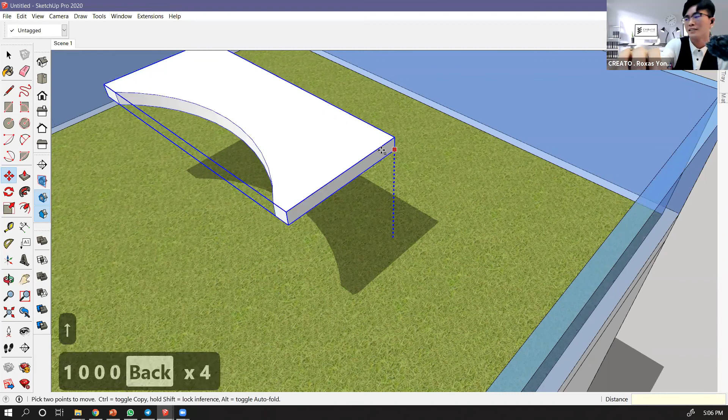And then we have the leg. Let's say a round one. Circle. Okay, then maybe diameter 30.

Okay, group it, move it. Then this leg can make it become a component. Apply what we learned just now, because when I change one leg, others will follow. All repetitive elements you can make them become a component.

Then push it. I select this face. If you find the other surface annoying, you can hit the dot to hide it, to isolate it. Then I can push it, then show it again. Others. So to the floor, this one I push to the bottom.

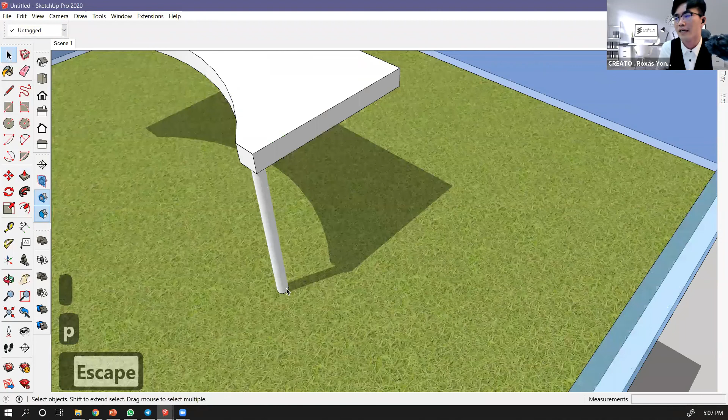So this one actually I can make the bottom slimmer. Let's say I hit K. No, K cannot. Let's say I want to select the bottom faces.

Very good question, so now everyone can learn extra things. If I want to select the bottom faces, but they're within the ground, how do I select it? Some students will move it higher, then try to find the angle. This is fine, but more steps. Now you have a better option: you can hit the dot to isolate the other things, then you can select the faces below.

Right, cool. Then I can select this face, hit scale, hit control, then it becomes slimmer at the bottom. Then this one becomes a cone already. Not that slim, maybe like this.

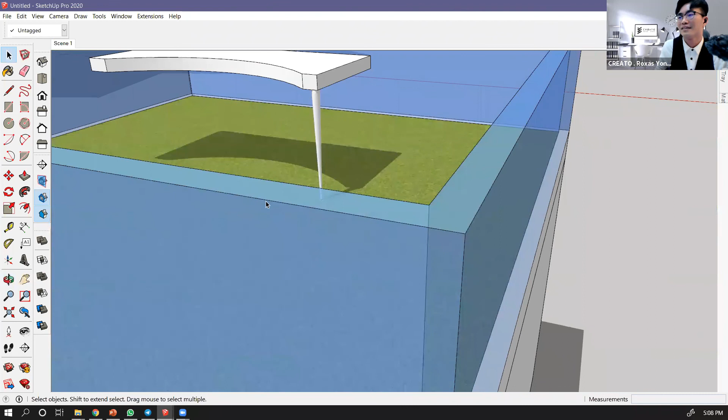Okay, then here a slim leg, very slick design. Okay, maybe should be bigger. Okay, that's fine, just for exploration.

Then we copy it from here to here. And since you are new, I will not be using the mirror tool, you'll learn it in the next lesson. So I just copy it like this.

So let's say if I want to change any one of them, all will follow. Even if I apply materials, all will follow. Let's say the aluminum just now, so this one maybe too thick, so this one is timber.

Yes, does it inspire us, Shirin? Yeah, thank you. Okay, you want to model a MacBook here? Okay, that's your mini task.

Yeah, and I have another question. Please. Because I downloaded this SketchUp, my drawing panel is not the same as yours. My panel only has 1 row on top, as I saw yours has 3 rows. Oh okay, this is a good question.

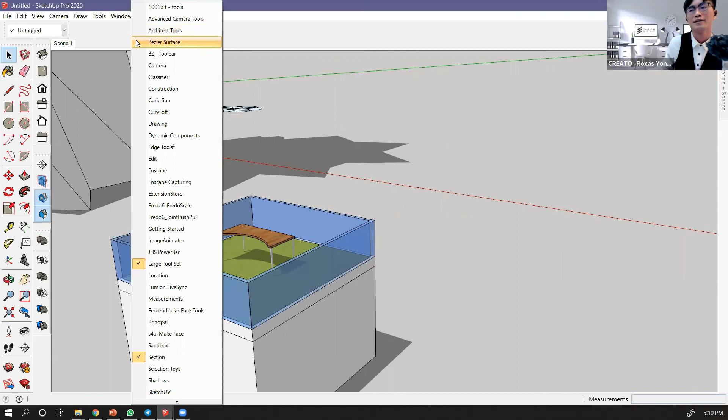So remind me personally if you need the recordings. Okay, and then just a quick one: you can find all the toolbars when you right click this empty area here, any empty area. So on the left we have large tool sets, and the other few things are section, solid tool, and text.

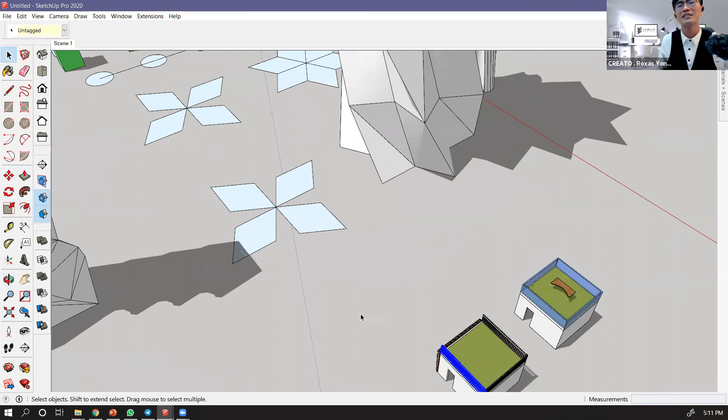Okay, let's practice this at home this weekend, this coming weekdays. Practice, find some, make some nice facade, or fins, louvers, and some nice pattern to create nice form. Okay, next class onwards, we will have greater tools for you to make greater shapes, greater forms.

Of course, you are not limited to use the tools we taught only. If you have extra tools, you can apply also. I want everyone to have like a breakthrough for yourself.